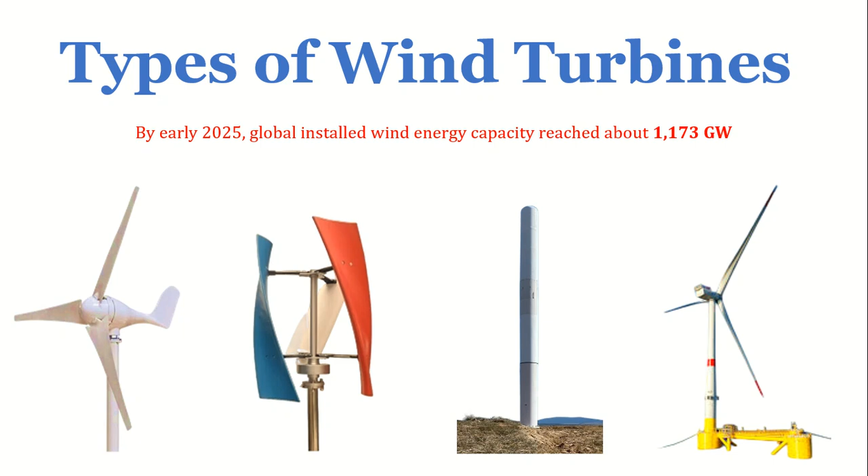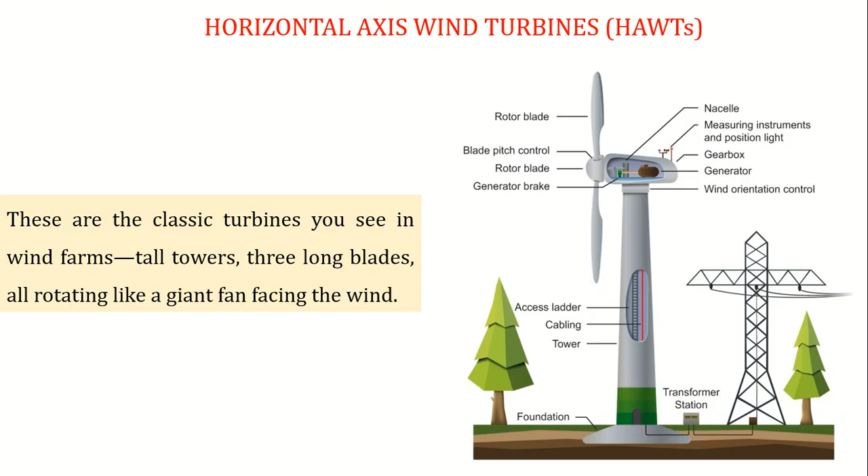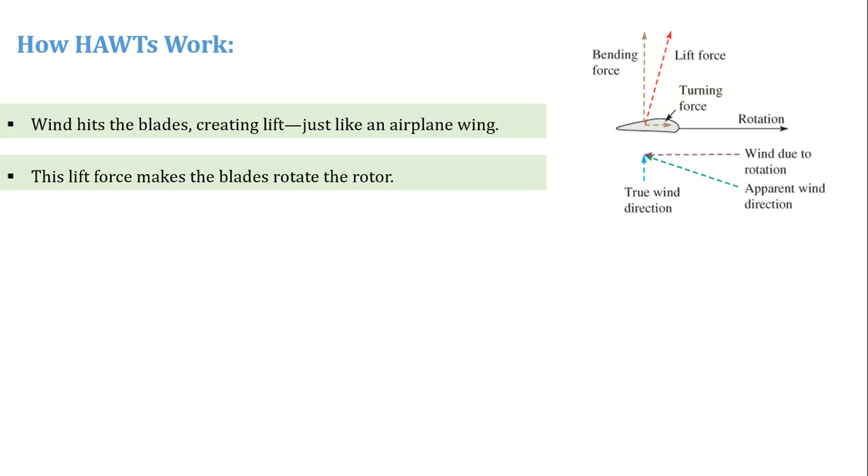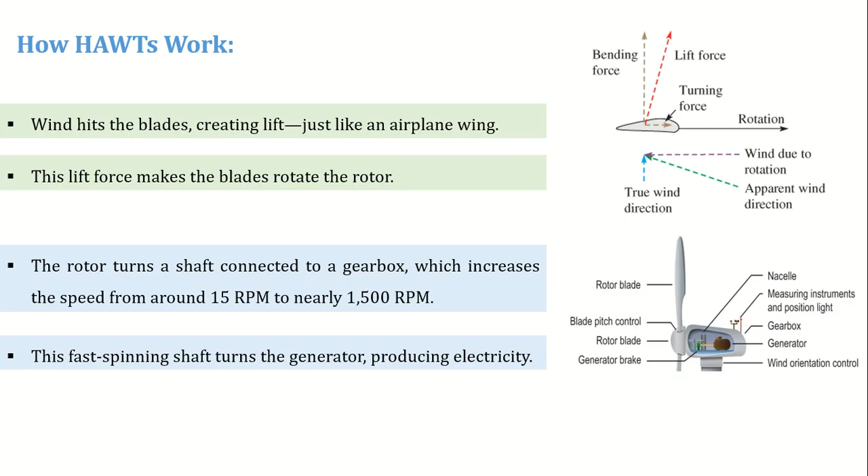Let's start with the most common type, horizontal axis wind turbines. These are the classic turbines with tall towers and three long blades, spinning like a giant fan facing the wind. Their working principle is simple yet effective. When wind hits the blades, it generates lift, similar to the aerodynamic forces on an airplane wing, causing the rotor to rotate. The rotor turns a shaft connected to a gearbox, which increases speed from around 15 RPM to nearly 1,500 RPM.

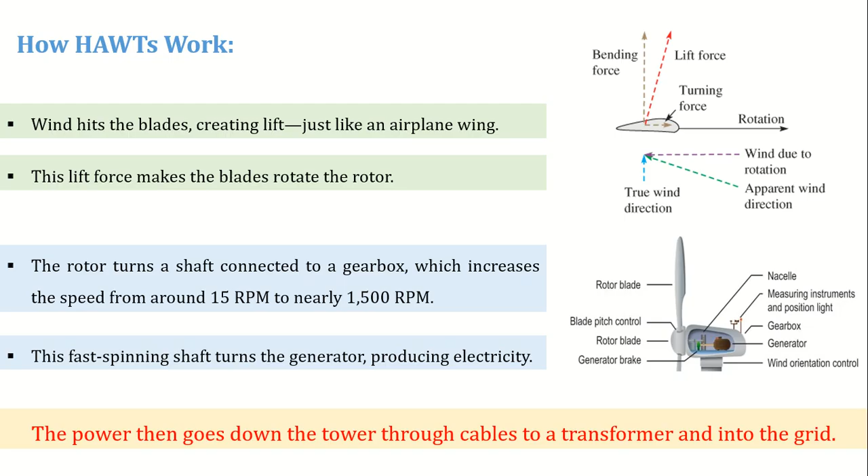This high-speed shaft drives a generator, producing electricity. The power then travels down the tower through cables to a transformer and finally into the grid, supplying homes and businesses. Modern horizontal axis wind turbines usually stand 80 to 120 meters tall, with blades 40 to 60 meters long, generating 1 to 12 megawatts, enough to supply roughly 5,000 homes.

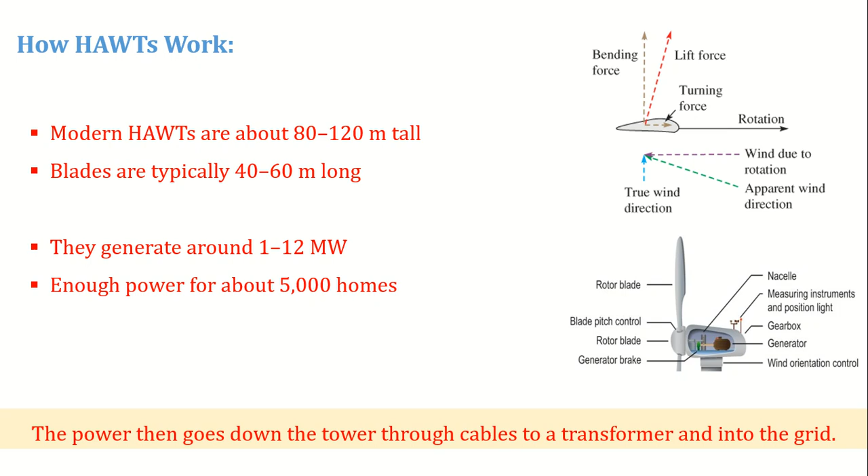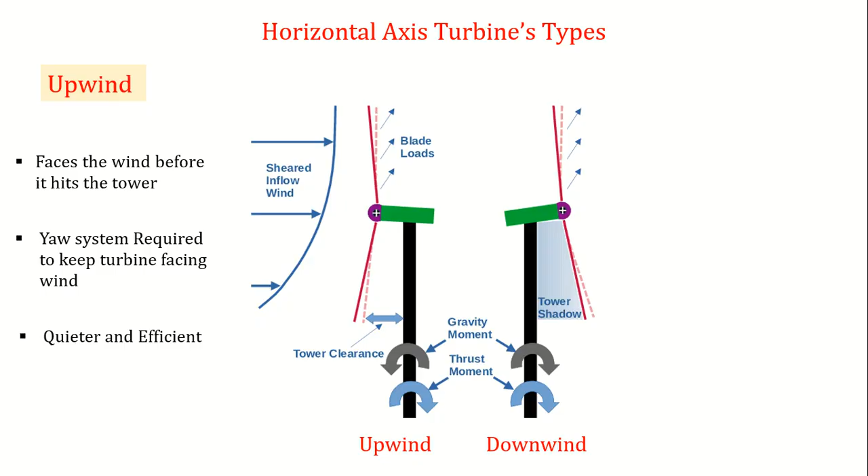These turbines come in two main designs, upwind and downwind. Upwind turbines face the wind, are efficient and quieter, but they require a yaw system to keep facing the wind. Downwind turbines align naturally with the wind, though the passing blades create turbulence and extra noise known as tower shadow.

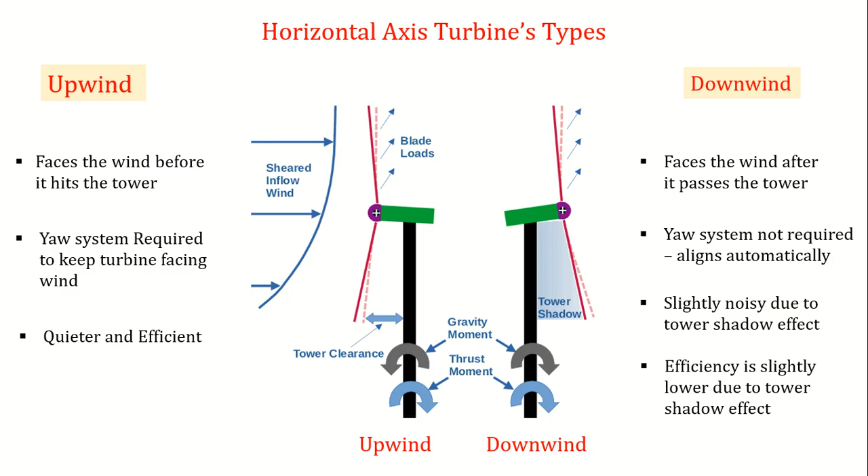Horizontal axis wind turbines are highly efficient, reliable, and capable of very high power output, 2 to 15 megawatts, with new models exceeding 20 megawatts. However, they need open spaces, strong winds, tall towers, and long blades, and are less efficient in turbulent conditions, such as cities or valleys. Now let's move to vertical axis wind turbines.

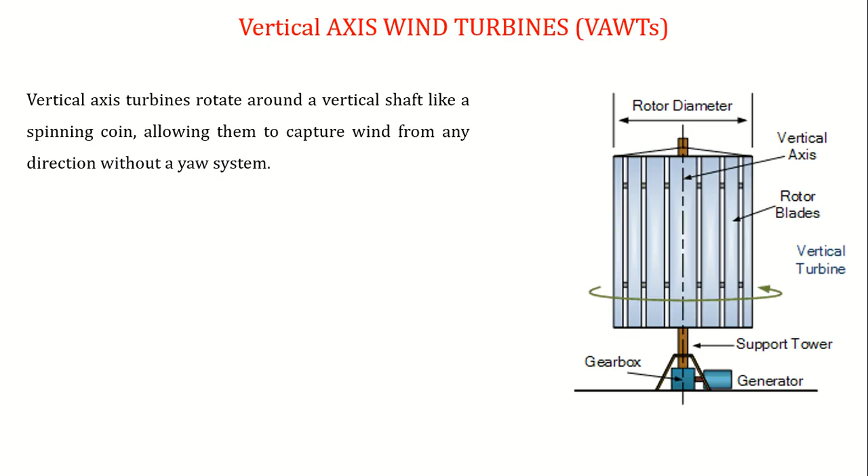Unlike horizontal axis wind turbines, vertical axis turbines rotate around a vertical shaft like a spinning coin, allowing them to capture wind from any direction without a yaw system. Wind pushes the blades, rotating the turbine and driving a generator placed at the base.

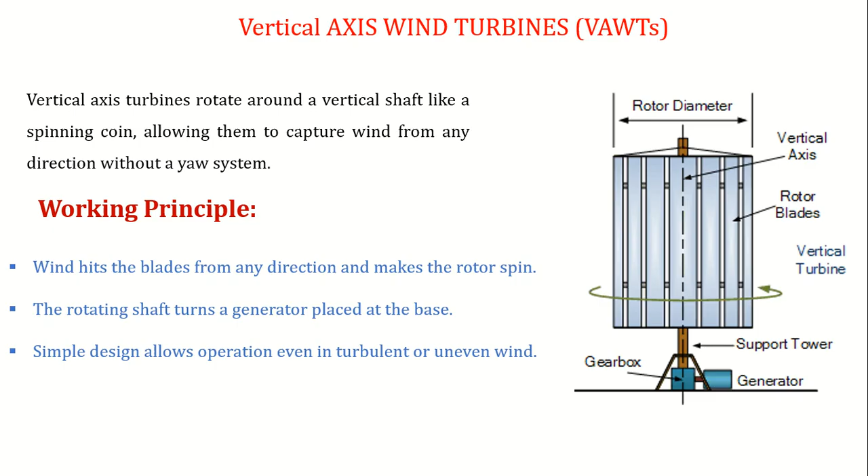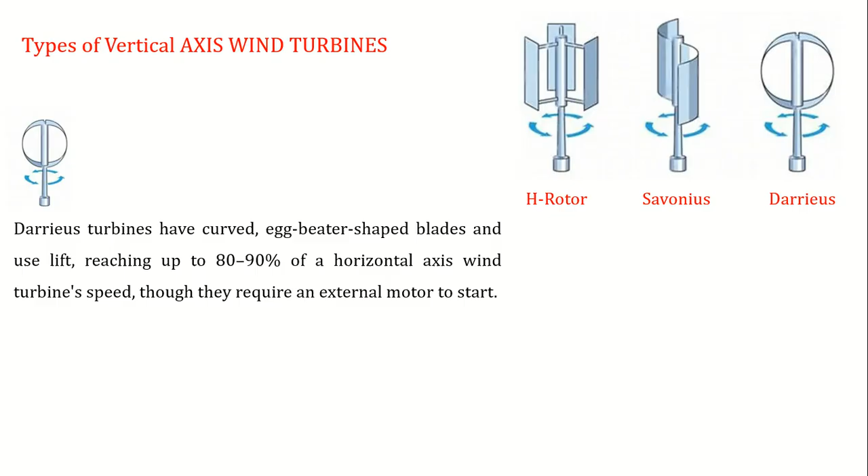There are two common types of vertical axis turbines. Darrieus turbines have curved, egg beater-shaped blades and use lift, reaching up to 80 to 90% of a horizontal axis wind turbine's speed, though they require an external motor to start.

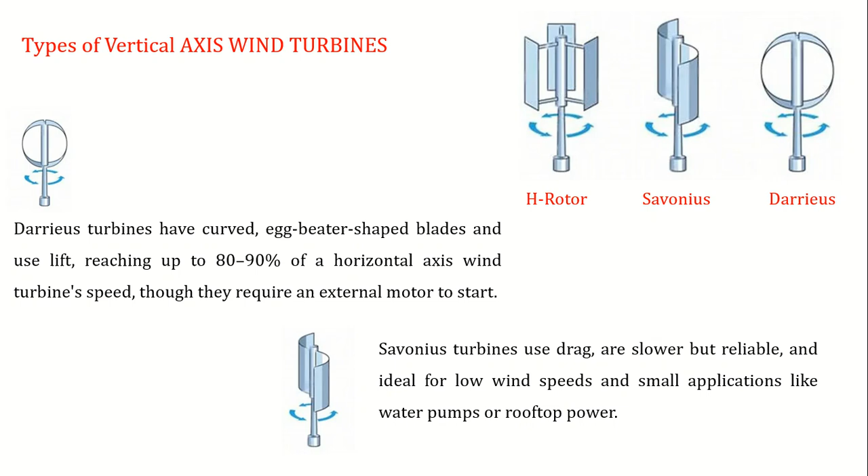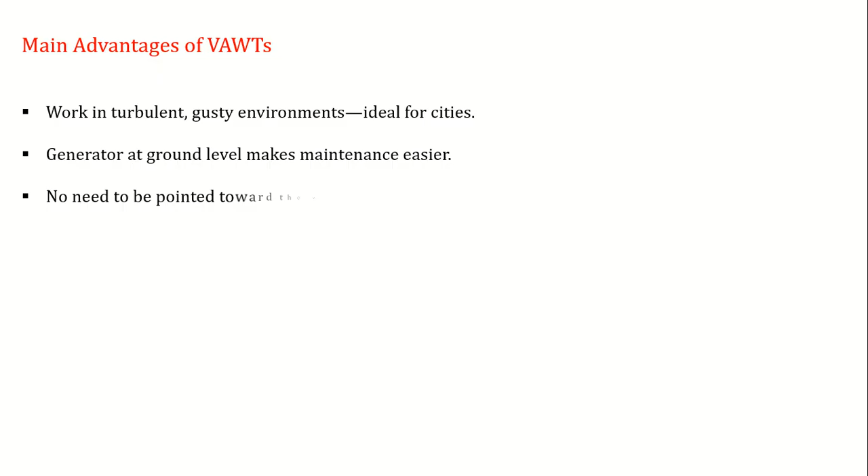Savonius turbines use drag, are slower but reliable, and ideal for low wind speeds and small applications like water pumps or rooftop power. Vertical axis turbines work well in turbulent urban environments, are easy to maintain due to ground-level generators, and do not need to face the wind. However, they are generally less efficient and not suitable for large commercial wind farms.

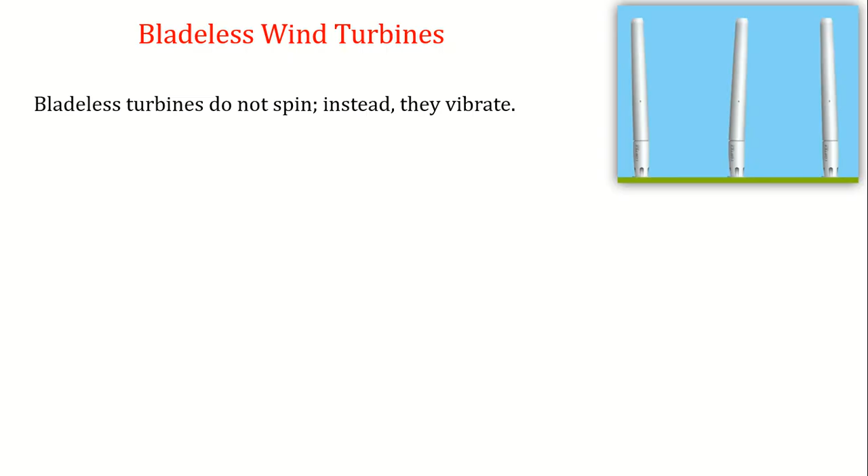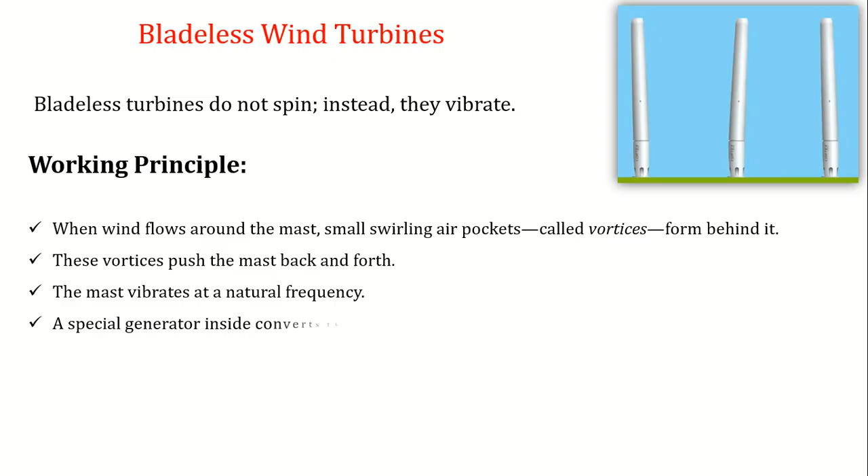Next, let's look at bladeless wind turbines, a futuristic concept. These turbines do not spin. Instead, they vibrate. Slender poles oscillate when wind flows around them, creating small, swirling air pockets called vortices. The mast vibrates at its natural frequency, and a generator converts this motion into electricity.

Small bladeless turbines produce 50 to 100 watts, with larger versions in development. They offer low maintenance, minimal noise, and strong suitability for urban areas. But output is currently low, and the technology is still experimental.

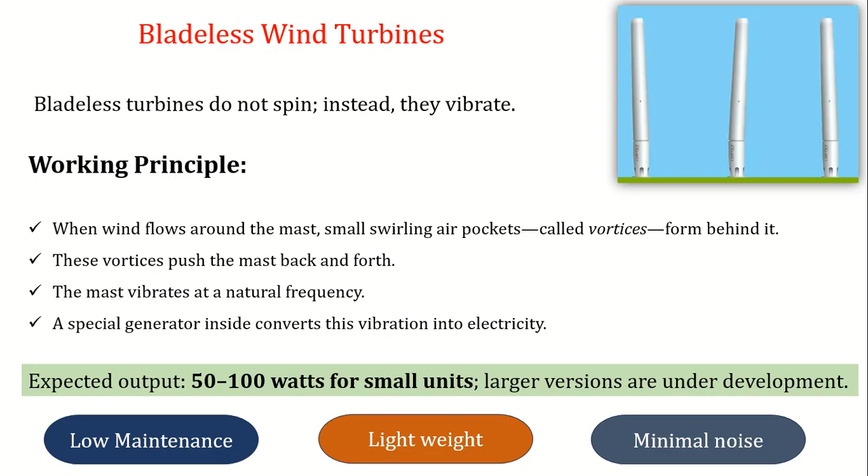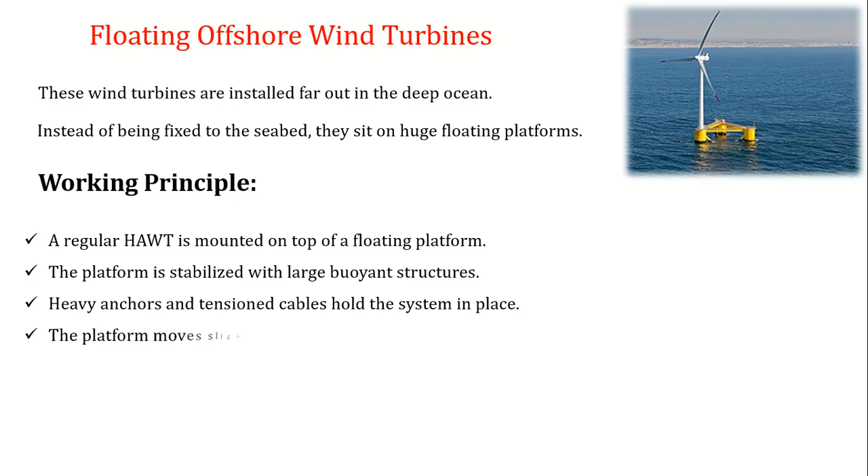Now let's move offshore to floating wind turbines, designed for deep waters where fixed foundations aren't feasible. A horizontal axis wind turbine is mounted on a floating platform, stabilized with buoyant structures, heavy anchors, and tensioned cables. The platform moves slightly with waves, but advanced control systems keep the turbine steady.

Floating turbines operate in 50 to 1,000 meters of water and produce 8 to 15 megawatts per turbine. Offshore winds are stronger and more consistent, allowing high energy output. Floating turbines reduce the need for heavy seabed foundations and can be placed far from shore, though installation is costly and engineering is complex.

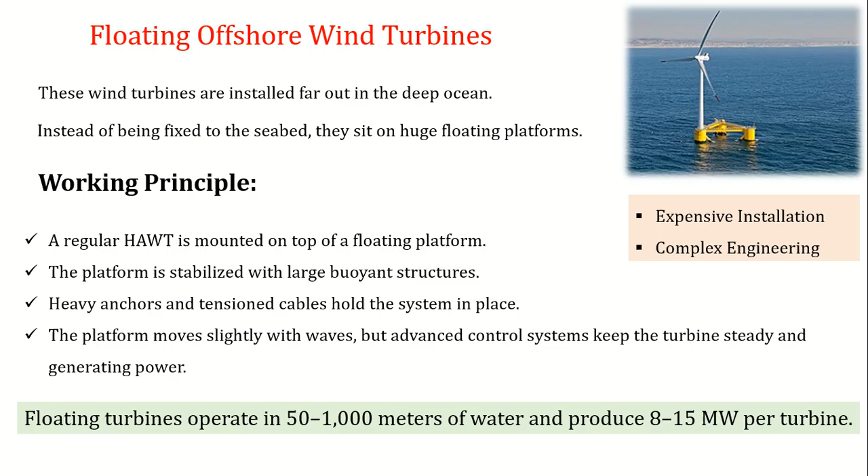Finally, the wind energy industry is rapidly advancing. Engineers are developing giant 20-plus megawatt turbines with rotors 250 to 300 meters in diameter, capable of powering entire communities.

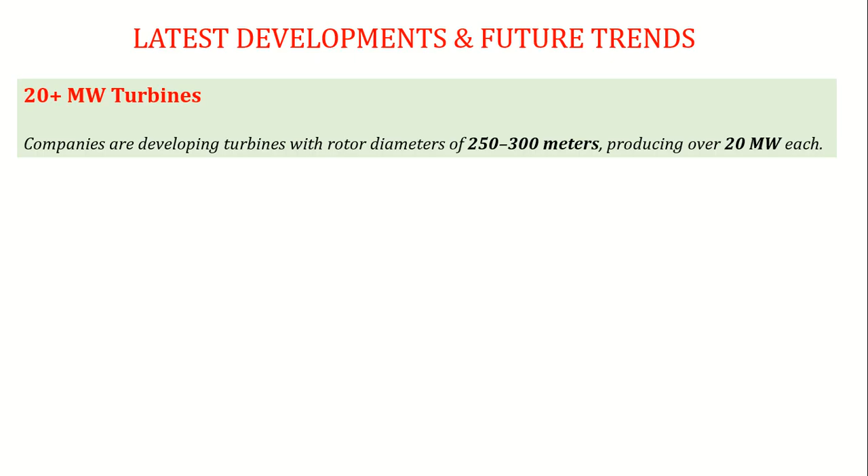Smart blades with sensors adjust automatically to reduce fatigue and extend lifespan. Hybrid solar wind towers capture both energies, and offshore wind farms are producing green hydrogen for clean fuel. Next-generation multi-rotor vertical axis wind turbines, advanced floating platforms, and scaled-up bladeless turbines are also emerging. Together, these innovations point to a future where wind power is more efficient, versatile, and central to global clean energy.